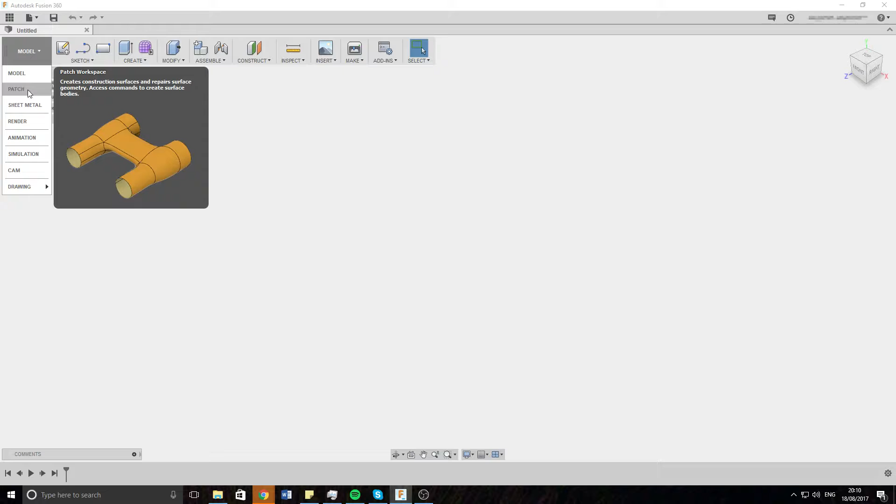You have your model workspace, patch workspace, sheet metal workspace, rendering workspace, animation workspace, simulation workspace, CAM workspace, and drawing workspace. Let's start with these first couple - these are where you're creating your model. Then you have your outputs like simulations, and then your CAM and drawing stuff.

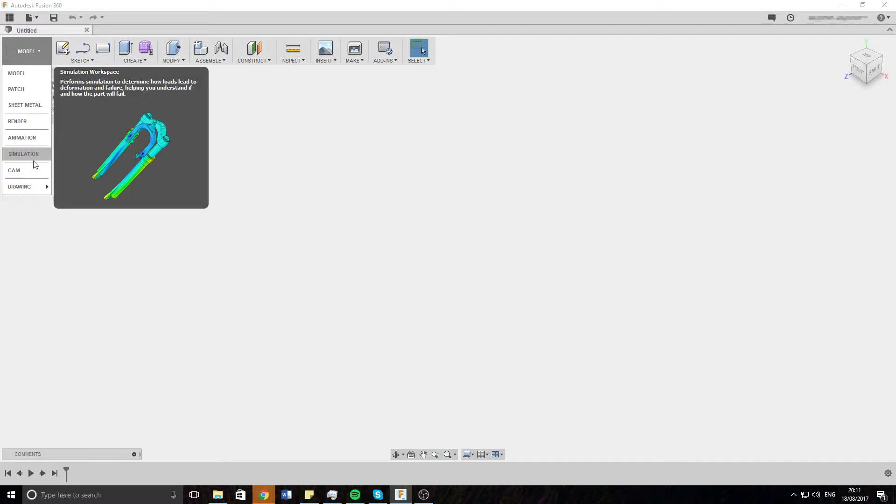So let's start with the model interface. It's very similar to SolidWorks along with most CAD packages.

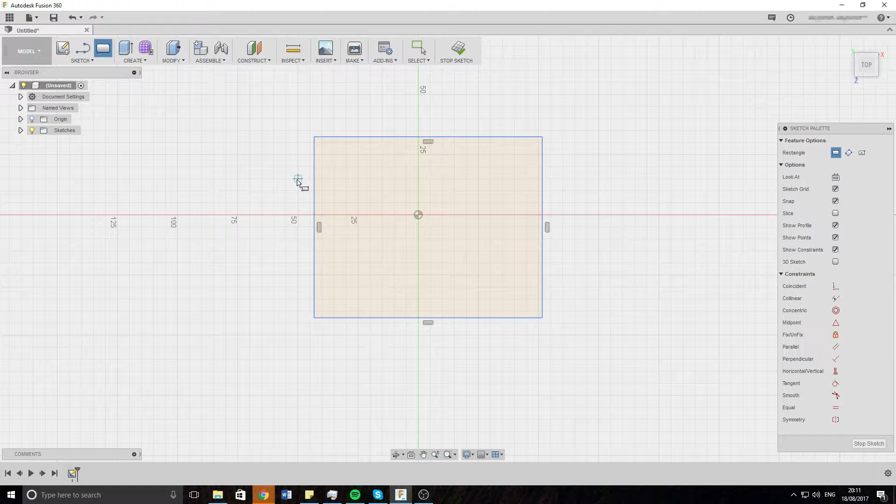You can start a sketch, click on whatever size you want, and it's going to have a nice little fun time. For example, we can draw a little rectangle, then hit D, which is your dimension feature, and say let's make it 50 by 50. Job done. Hit E, we want that to come out by 10, let's say. So that is created as a little square geometry bit, and you can do all these sort of cool things.

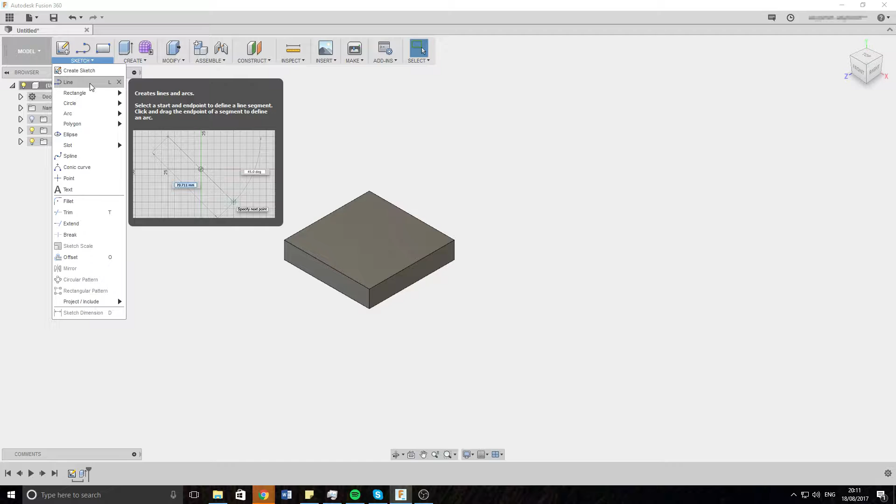Under sketch there's all of your options: create, modify, and so on. On the sketch you can do all your sketching bits when you're within a sketch, like lines, rectangles, circles, arcs, polygons, and so on.

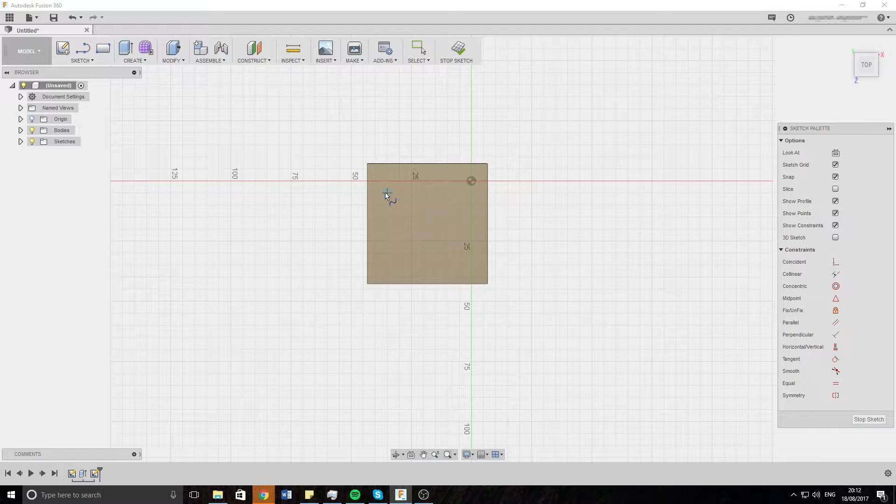This is where you can lay out your design, and you can pretty much create anything - well, you can, but it's sometimes difficult. So for now, let's just get a spline and make some weird shape, because I'll show you how to use the CAM built into it in a minute.

So there you go, hit E on that. We'll say that comes up 10 again, like that. There you go. So now we go on - that's the artsy sketching.

Now we've got creating - this is like extruding, all them sort of things. Within SolidWorks, this is your features menu. You've got your extrude, which you've just seen - you draw a sketch, you can extrude it upwards, or if you go into a bit, it will cut it away.

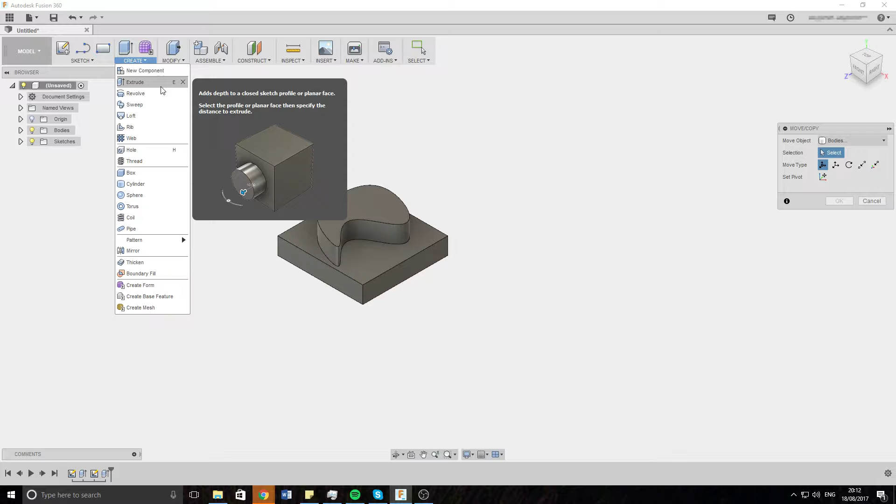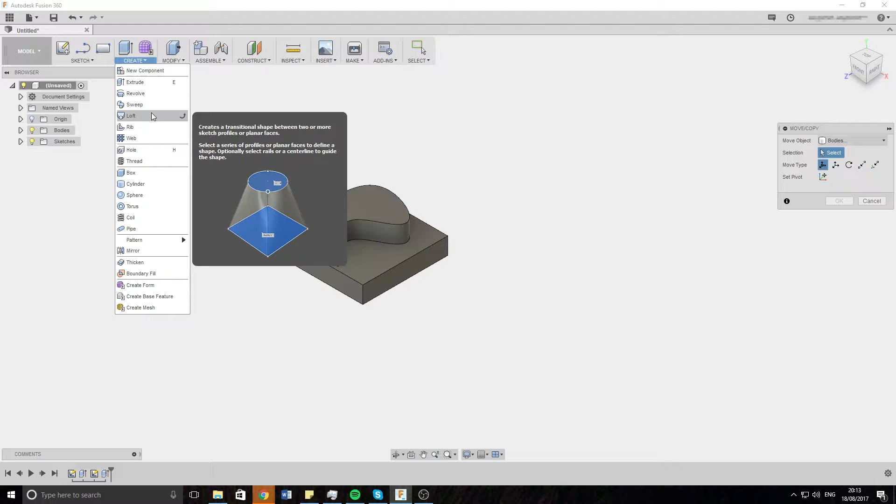A revolve is where you basically revolve a profile around an axis to make circular objects. A sweep is where a profile follows a path, which then creates things like pipework and stuff. You've got lofts, ribs, webs, all that sort of stuff.

Holes, so you can create holes without just cutting it away. Threads, add threads. Boxes, cylinders, spheres, torus, coils, pipes. Patterns, so you can create multiples of stuff quickly.

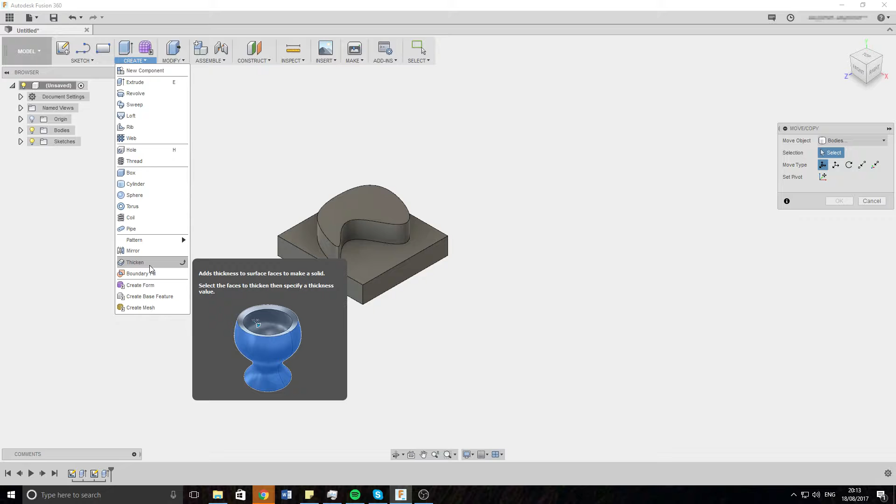You can mirror stuff, you can thicken stuff - say you did surface modelling, you can just make it thicker. You've got your boundary fill, you've got forms, base features, and meshes.

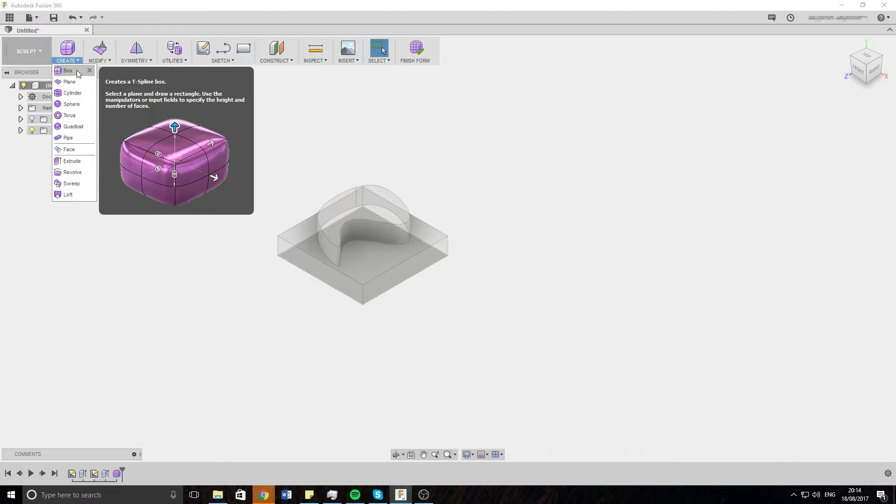So forms, that's another one on there, who knows. Forms is under the sculpt menu, which is cool - this is like basic surface modelling.

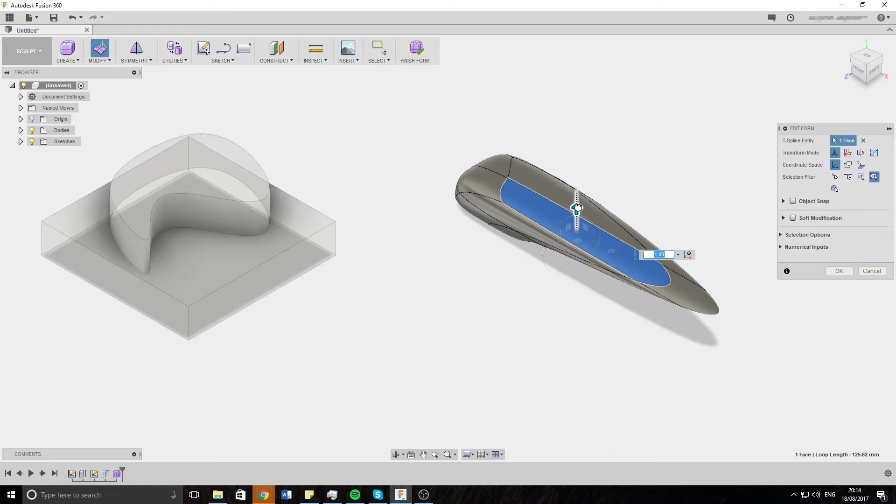So we'll go like that, and then you can make that a little bit, just accept that. Then within this, you can click on modify and drag it all around to make some really complicated shapes, which would be pretty difficult to do within the other menus, basically just normal solid modelling as it is known. Cool.

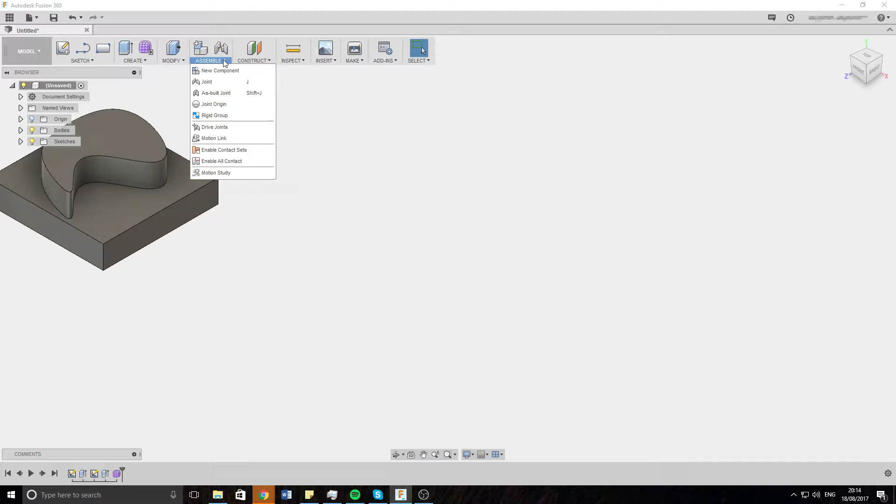Now we've got modify, which is your press pull and all of them, very similar to other CAD packages. You've got fillet, chamfer, shell, draft, same sort of stuff as before. Assemble - this is where we can do all your different sort of joints.

This differs from SolidWorks mostly in that if you create a different body - so this is one body - if you do another sketch over here, say, and then finish that design, you can then assemble it without having to create an assembly and put them both in, and then you can do different contacts and motion links.

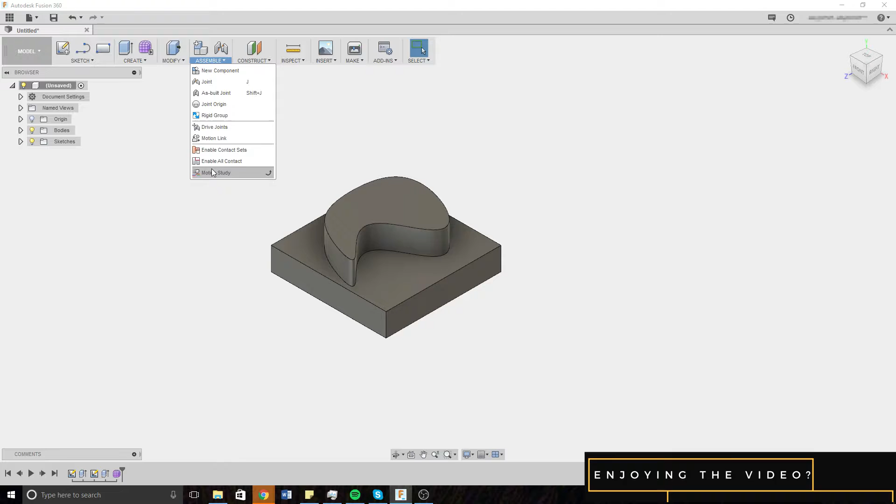So say your gears and stuff, it would all interact as it would. You can create all your planes and plane bits as before, which is all your reference geometry. You've got different axes and stuff like that.

Inspect, you can measure bits and deal with different basic analysis, like make it look like a zebra. Insert, you can insert pictures, all different files. If you want, you can even insert like SolidWorks files and bits like that.

Just upload it to the Fusion 360 cloud, it will convert, and then you can import it to whatever you've got. Also, I don't know if it'll actually work, who knows.

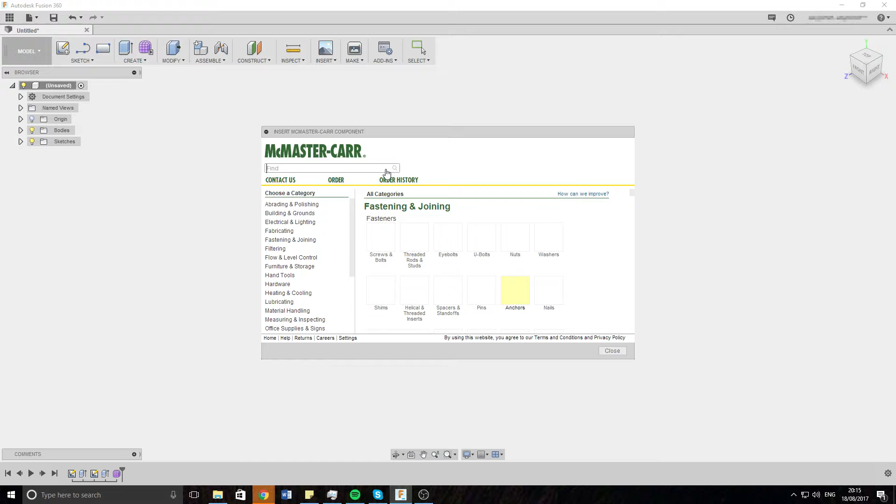There you go. It has a McMaster-Carr component-like bit where every single one of their products has got a 3D CAD file for it. So say we wanted one of them and we wanted that size, you can order it straight from there.

If you go here, there's a way to import it, but I haven't really mucked around with this. Anyway, so yeah, you can 3D print it straight from here. You can get quotes from different manufacturers and bits like that, add-ins, and then your selection stuff.

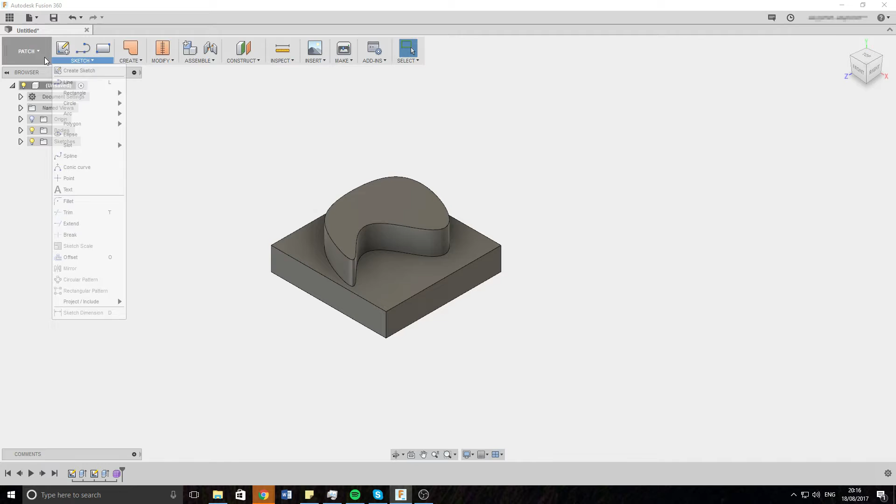All simple stuff. Patch, I haven't really used much, but if you hover over it, like everything in Fusion 360, great idea - every bit of software should do this. Hover over it for a couple of seconds, it tells you exactly what it means, so it tells you sort of bits like that.

Sheet metal. You can do sheet metal fabrication in this. Say you're making a box out of sheet metal, it will tell you where to bend it, and it will be able to unbend it, bits like that. Very similar to the rest, you can create all this different stuff.

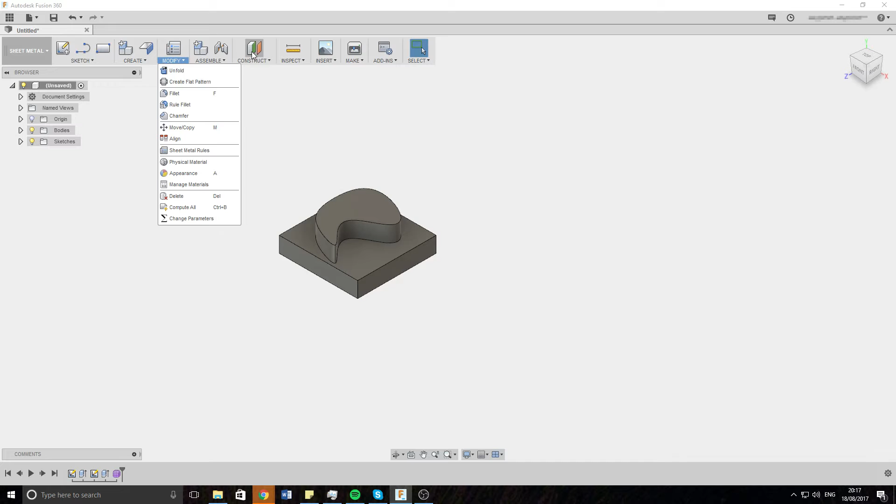If you want to learn further, watch tutorials on YouTube and stuff, or we might create some more in the future if you want that. Got all that sort of stuff.

Render, this is where you can create pictures of the design by setting up lights and bits like that. So say you had a finished product and you wanted to show people what you're going to make, you'd do one of them.

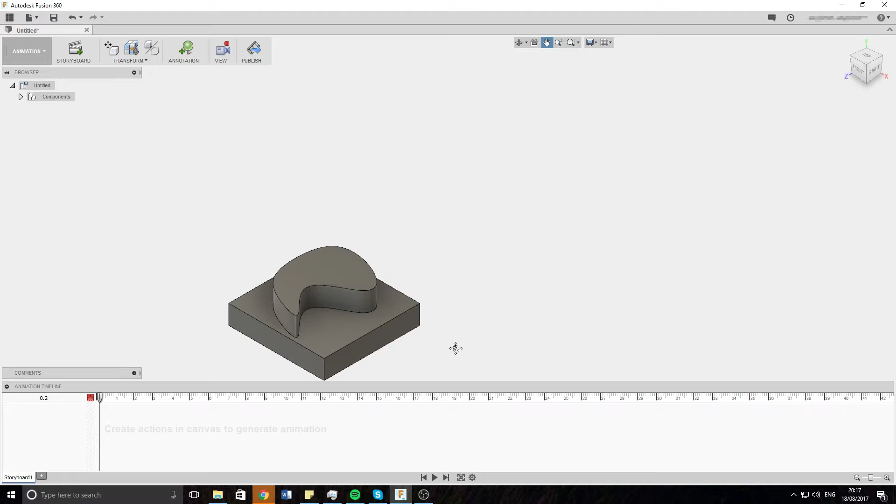Animation, you can make an animation really - what you're starting with, so we'll say that. And we'll go there, and we'll go over here, not select even, like that, and zoom right in. So then when you hit play and move around, you can export this as a video, and there you go.

Again, if you're showing off motion stuff, you can have it all moving. Say you made an engine, you can show how it's going to work.

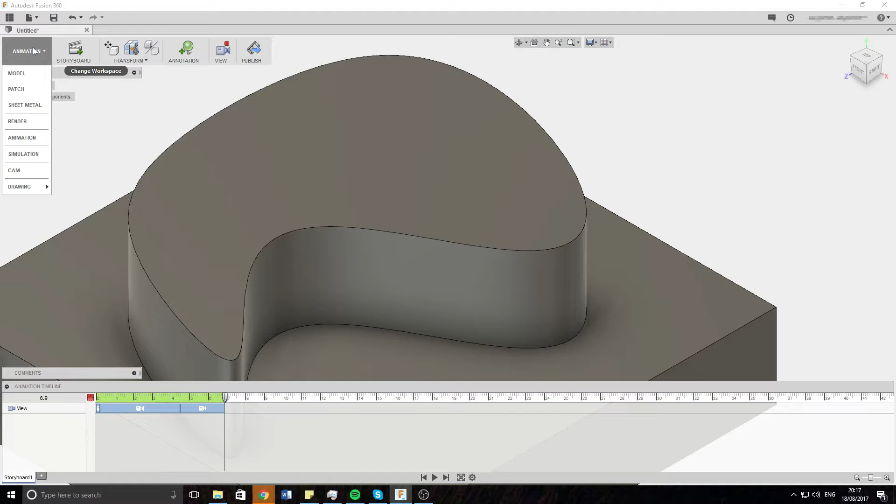Now onto simulation, a really fun bit. So simulation can show you how your model will perform in the real world without having to make it. So you can do loads of different sort of testing.

All of these are different, and again, if you want to find out how to use them, ask us. We'll make a video, or we might make one anyway.

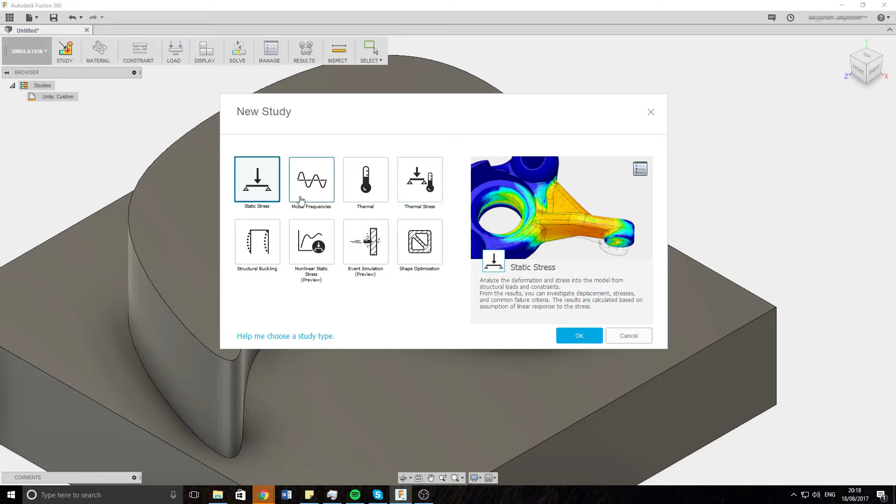So for example, static stress, it will take a while. You can set all your materials and stuff, and it will show you how it's going to move and stuff like that if certain loads apply to it. Again, very similar to the SolidWorks sort of one.

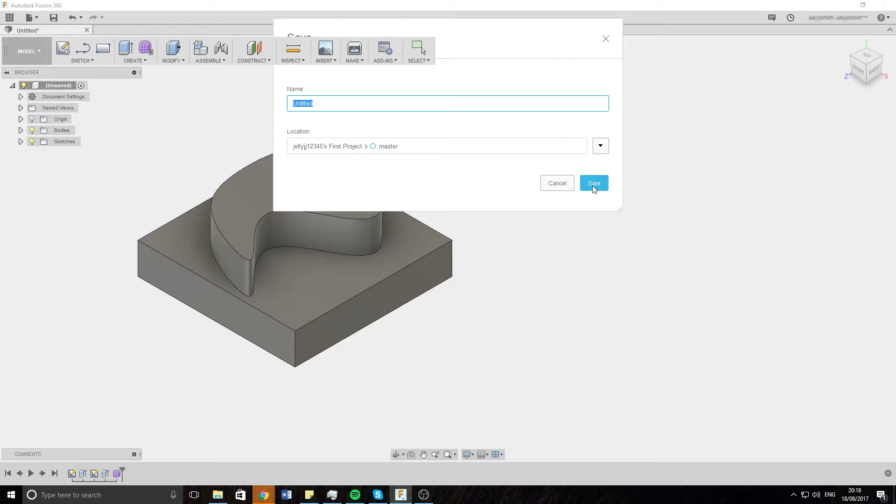Drawing, from design or animation, click from design, yep. And then yeah, we can make drawings from it basically.

Somehow, okay, who knows? Never really mucked around with this. Don't know SolidWorks, it's pretty easy in SolidWorks, but I haven't mucked around with this. Seems like it's going to be pretty similar.

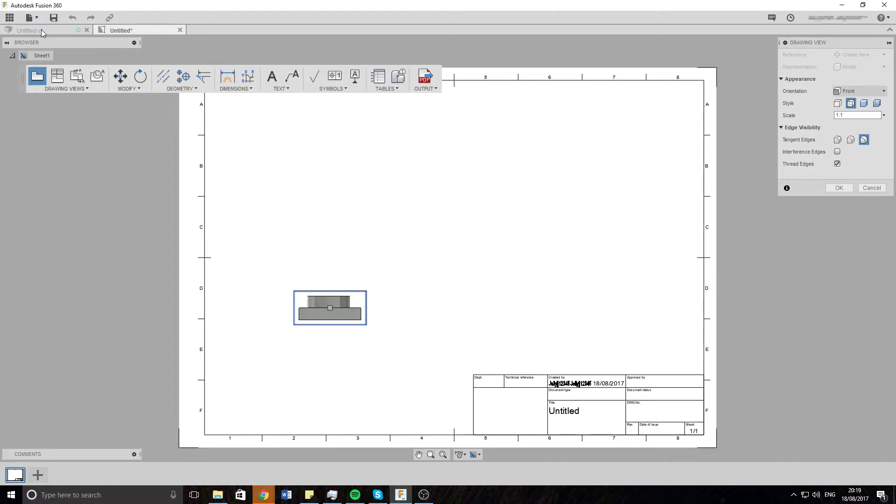Oh, don't know what I've done now. Oh, we're back on that one. Go on, back, pretty. Oh, there you go. It's basically right back to here.

So you might have noticed I've left the CAM to the last bit, because this is what I found the coolest. So from this, like design, once you've created it, if you have a CNC, this is what you'll probably mainly be looking at Fusion 360 for.

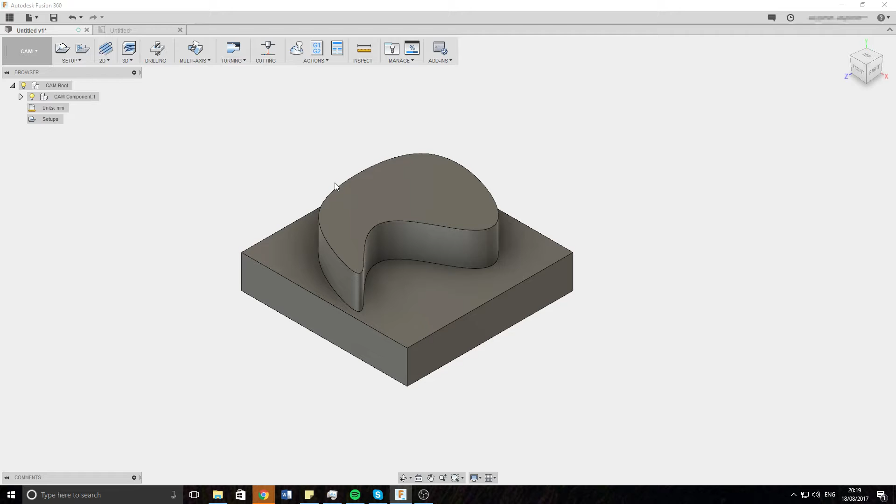You can have it so it will do all your different sort of milling and bits like that and all the rest of it to make your G-code. First of all, if you want to do this, you set up. This is not a definitive guide, this is just a basic how to use it.

Operation type: what you want to do, milling, mill turn, or cutting. We want to mill this because that's sort of what you do.

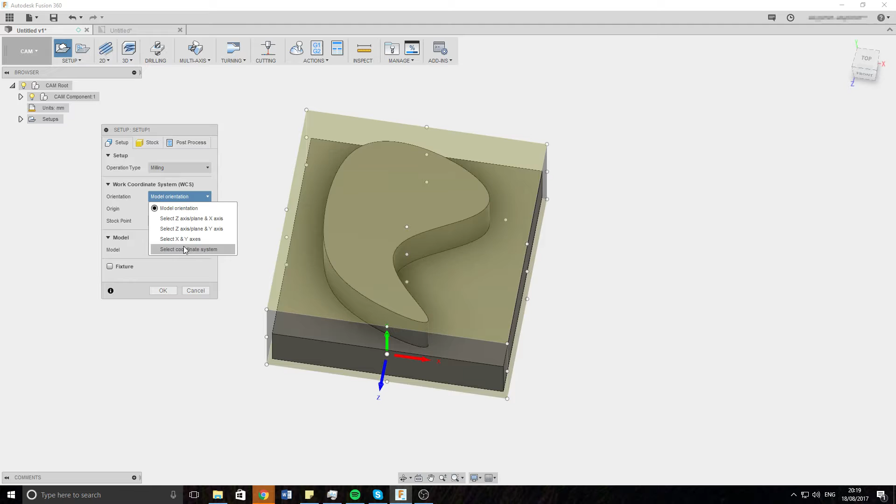Model orientation. This is where you set your Z axis for your operation, because you can do multiple in it. So we'll just do that, which sets the Z... oh, really mucked myself up. There you go, sets your Z axis the right way.

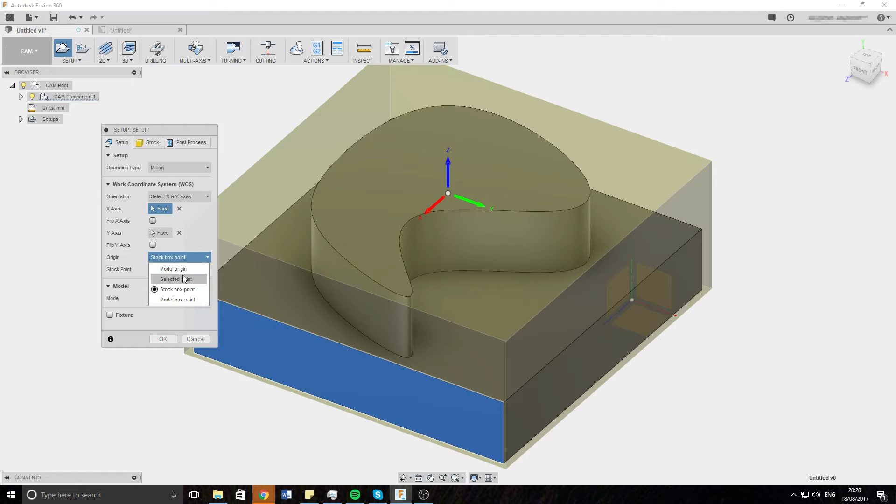Origin doesn't matter in this one, but this is just more stuff further on. So if you know CNCs, or have one, you'll understand more what this is all about. This is just set up for this and stuff.

So once this is set up, in this setup you can do all your different tool paths. Say we're making this, you'll probably start with facing. Select your tool, so let's just create a tool quickly, and it will be a face mill, and just accept that, that'll do, and it should be alright with that.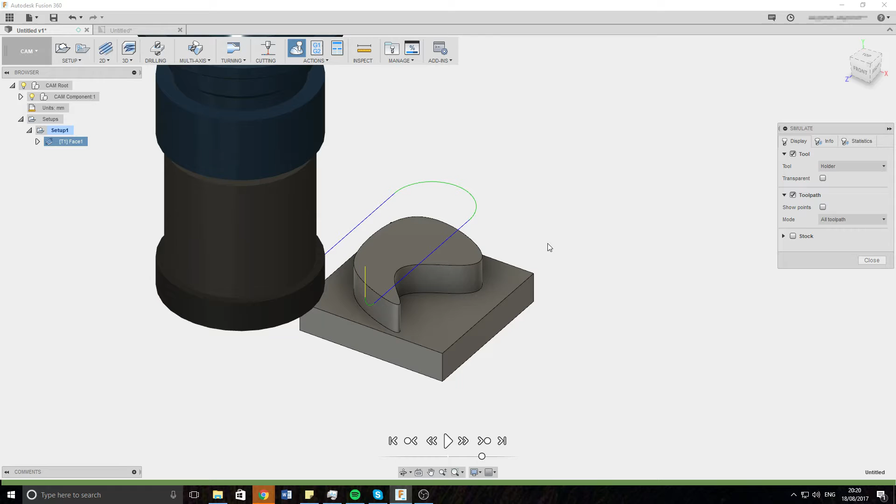Then that will create the toolpath to cut it out. Then you can click on simulate, or just simulate up there, then show stock, and then you can click play, and it will show it being made. So you've got your face in.

Let's go over some others. Let's do pocket for that, because I can't be bothered to do multiples. Cool, and we are going to want to use one of them. First we'll use a flat end mill, that will do whatever size that is, good quality, and then let's create that now.

So now if we go back to simulate, you can watch it, and you can see how it's going to go around your part and cut away. But again, if you want a proper CNC tutorial on this, comment in the comment section below.

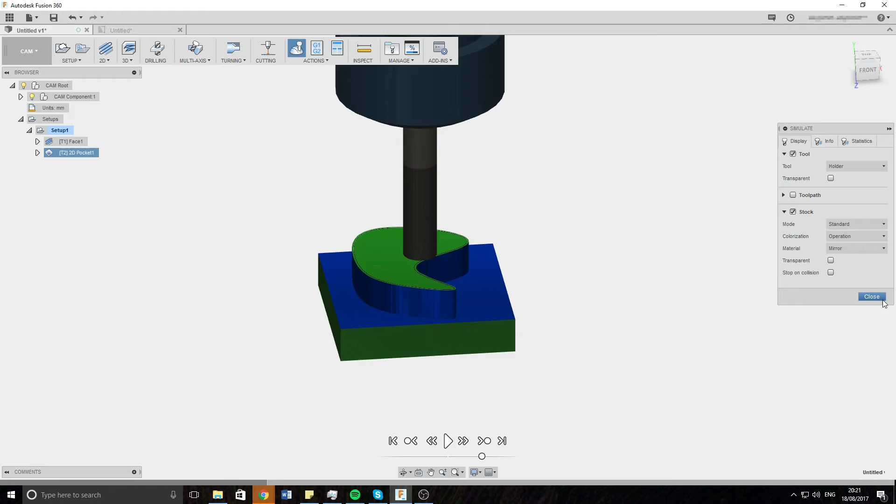So you've got all your different bits there for making different bits. Then you've got your 3D stuff, so say you have like a car to make, you can have it do it all and go over it and do all that. Drilling, tapping, all that sort of stuff.

Multi-axis, if you have a 5 or 4 axis, it can do all your contours and bits like that. Turning, if you're using a CNC lathe. Your cutting feature for doing 2D profiles and stuff, so you can use this to create your stuff for laser cutters and CNC routers and water jets and that sort of stuff.

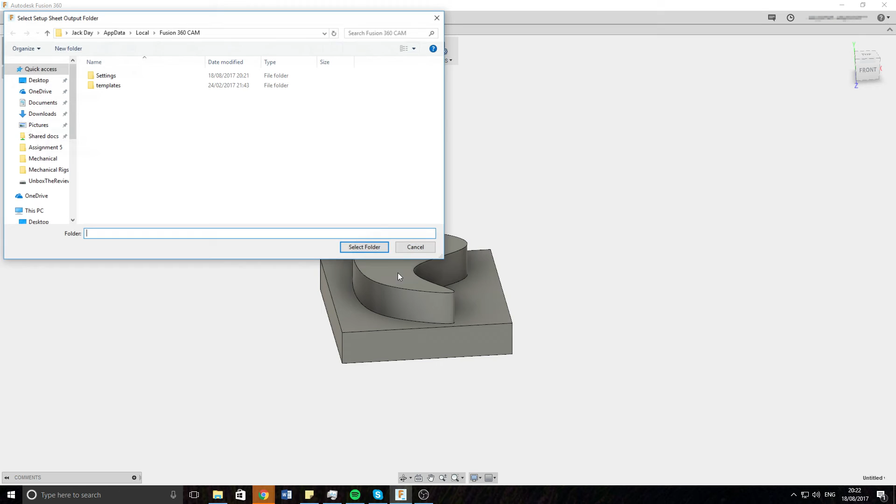This is where you can post-process and create a setup sheet, which I can't be bothered to do, so we're not going to do that. Specs, tool libraries, and that sort of stuff.

Pretty simple bit of software. Use the cloud, and it's free to use for most people, I think, unless they've changed it. Unless you're a big company and you're making loads of money, then yeah, you're gonna have to pay for it. I'm sorry, but it includes a lot of stuff for that. Most people can probably get it for free. I haven't checked because I've got it anyway.